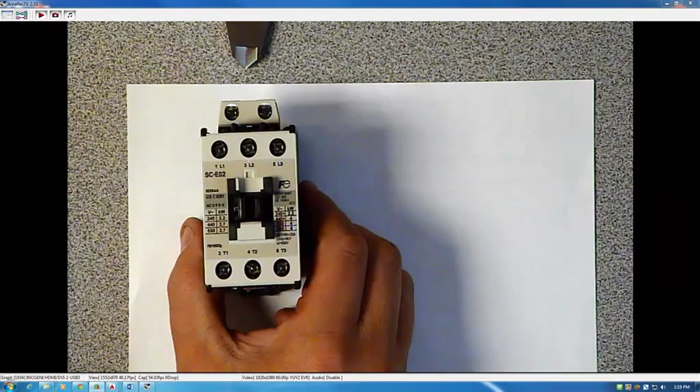This video is going to show you how to make a two-dimensional model of some components. So this is actually going to apply to almost all things you're going to measure and actually draw with AutoCAD. So first thing I'm going to show you here is this motor starter, or this contactor, I guess you would call it. It doesn't have overload contacts, so it is actually a contactor.

So oftentimes you would use AutoCAD to draw this component, an actual pictorial drawing of this component, and you would use it for laying out a basic electrical panel or any electrical panel for that matter. So it's very helpful to be detailed in your drawing and to actually include labels and things like that.

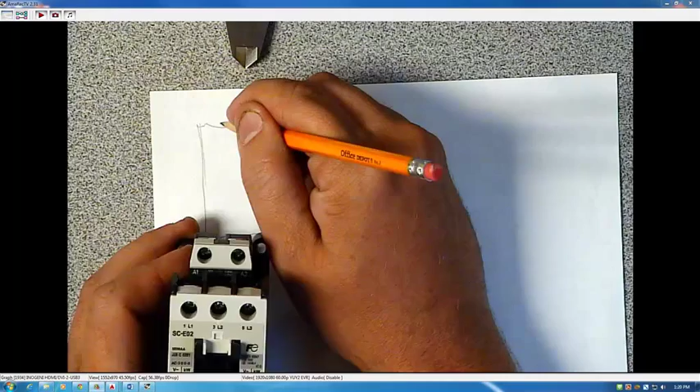Okay, so first thing I'm going to do is, you see I have a white piece of paper underneath this contactor. I'm actually just going to draw the basic shape of this, and it doesn't have to be accurate. It's just a sketch. Okay? And then what I'm going to do is I'm actually going to measure parts of this. Oh, I forgot this little bump on top here. Okay. So I'm actually going to measure some parts of this.

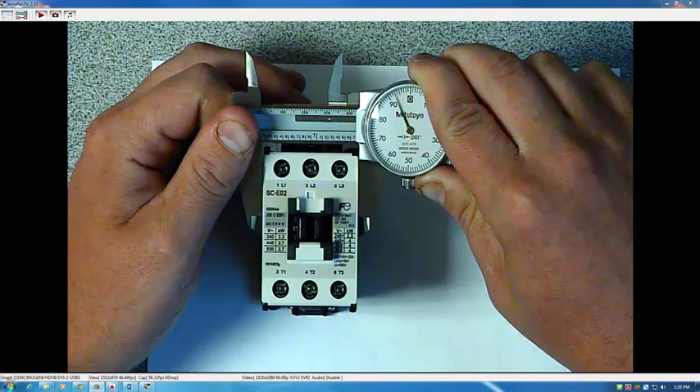So using our dial caliper, which you learned how to use in previous videos, we can read that this is 1.693 inches. Okay, so I'm going to draw in here 1.693.

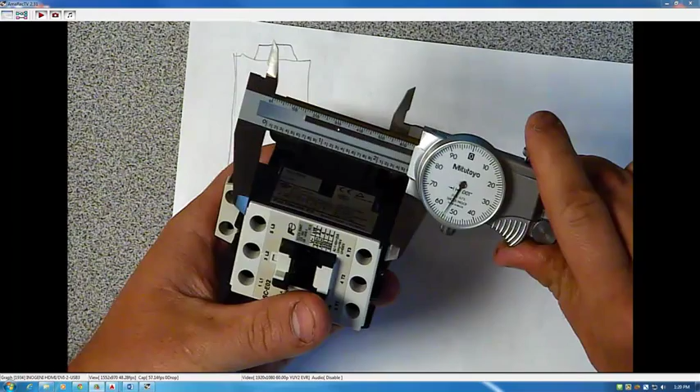And then the height, if we just kind of look at it and eyeball it, this top height right here is about the height of the whole contactor. Okay, and it's not critical to be perfect, but close is good. So this distance is 2.771.

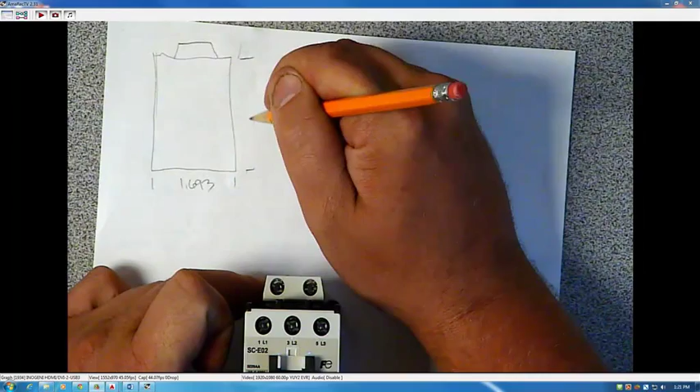Okay, and what I'm going to do is I'm going to measure this distance here as 1 point, that's pretty close to 1.1. We'll just go with that.

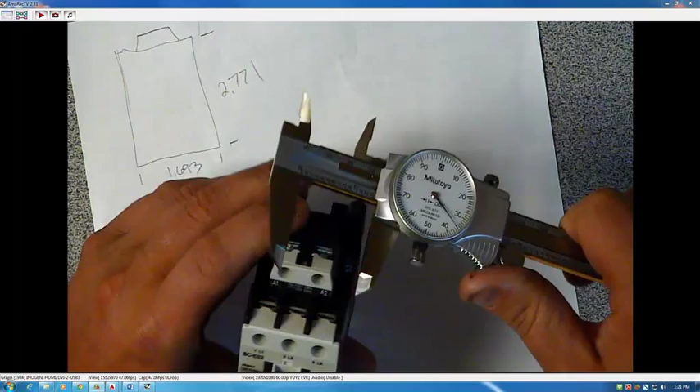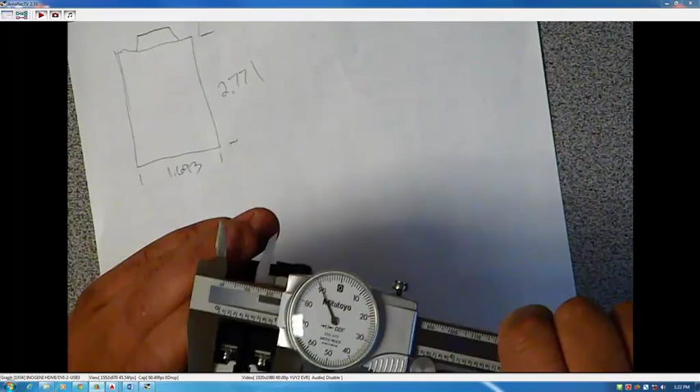And then this one, I want to measure, okay, I'm going to try to use the flats on your caliper. This is 0.99. We'll go 0.99. Okay, so put that in our sketch. 0.99,

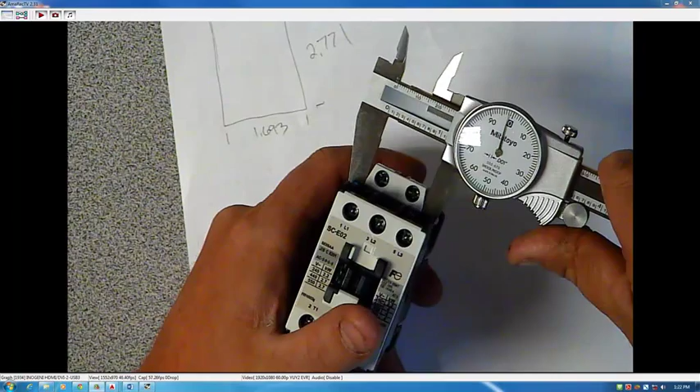1.1. Always measure twice, cut once. I think I forgot that measurement, so measure twice. 1.1. Okay. So that's the basic dimensions of this contactor here. Okay. So now for our holes,

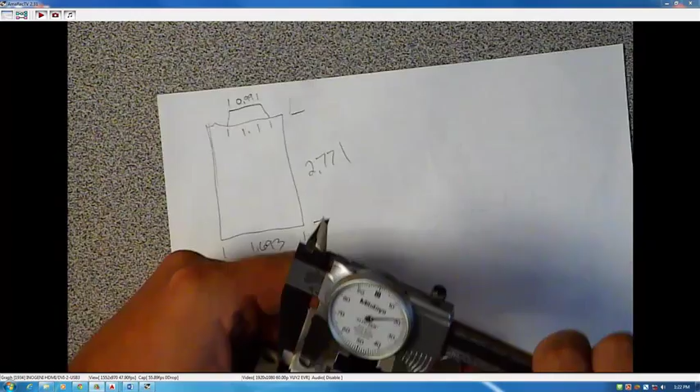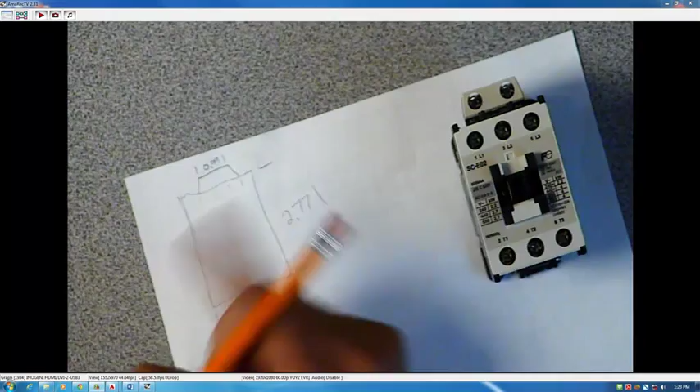we can actually measure to the edge of the hole, or the quadrant is 0.115. So 114, 115. So what I'm going to do is actually show this drawing on here. Show circles. .115. Okay. That's going to just kind of extend across here.

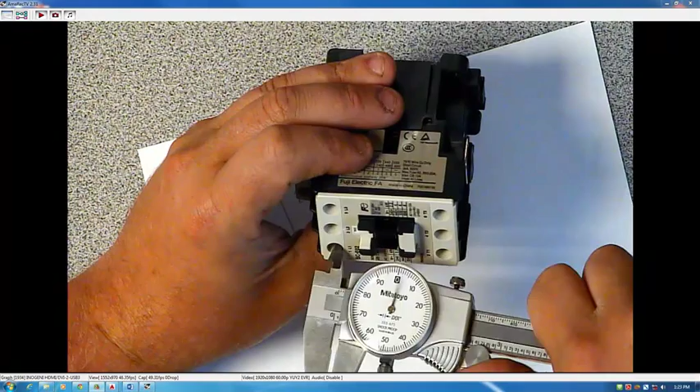We're going to measure the diameter of the circle using the inside of our caliper, the inside measurement tool. It is going to be 0.3 inches. If you look at the caliper, 0.3.

We're going to measure the distance from the edge. So it's 0.1, let's see if I can get that glare off there, 0.184. Put that on my sketch. I'll measure the distance between these. Point 213.

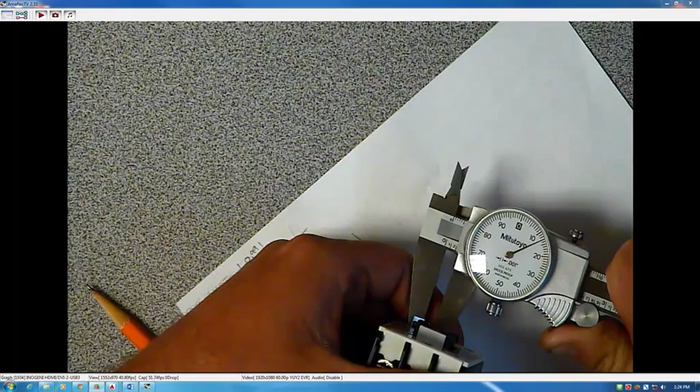And this one's going to be the same. 0.213. And this is going to be 0.184. Okay, so there's my sketch. And it's safe to assume that the bottom is exactly the same as the top. You'd just be measuring off this bottom here.

Okay? And now for this upper piece, you can actually just measure, we'll measure from this point here is 0.9.

I'm sorry, 0.09. So 0.090. 0.090. And this one is 0.090 from here.

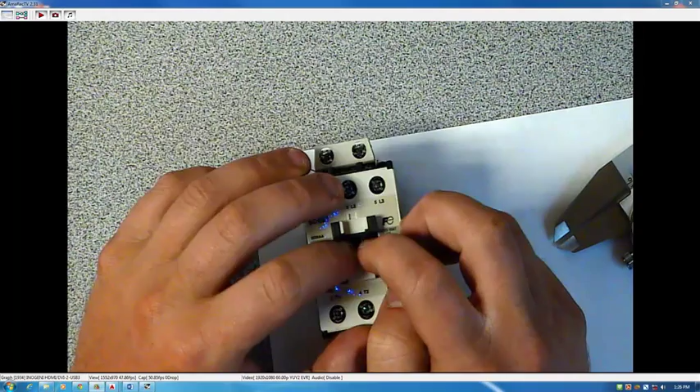Okay. Now, obviously, my sketch is not perfectly accurate, but it defines this pretty well. Okay, and then later on, I would actually dimension this center so it looks like a contactor. I'd measure this square here and measure the center here. Okay, but for right now, I'm actually going to open up my AutoCAD software and show you how to actually draw this based on our dimensions.

So I'm going to slide this over to the right. Open up AutoCAD. Just open up our base drawing here. See if I can get both these on the screen here.

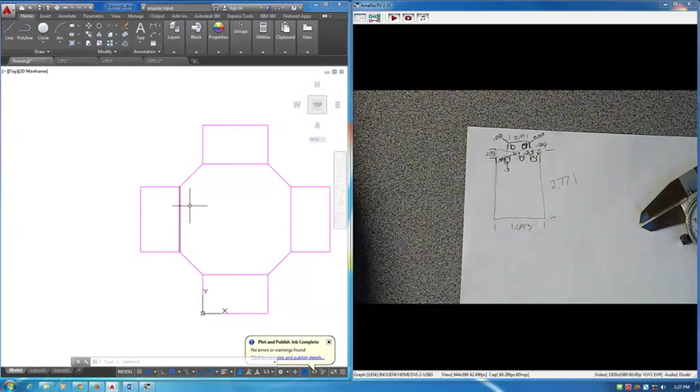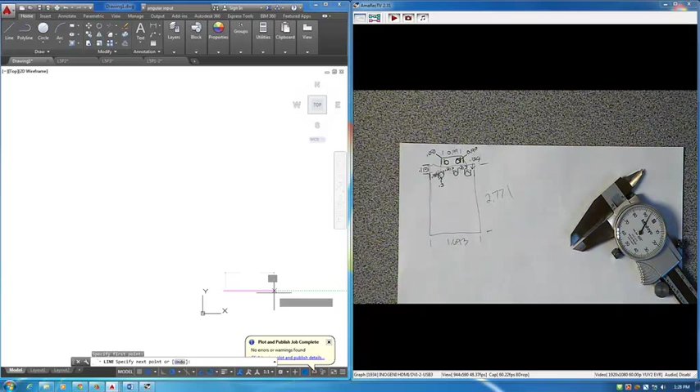Right. So let's erase this. This is from a previous recording. So I'm going to actually draw these dimensions we have on here. So let's start, specify that line. I'm going to go 1.693. I'm going to go up 2.771.

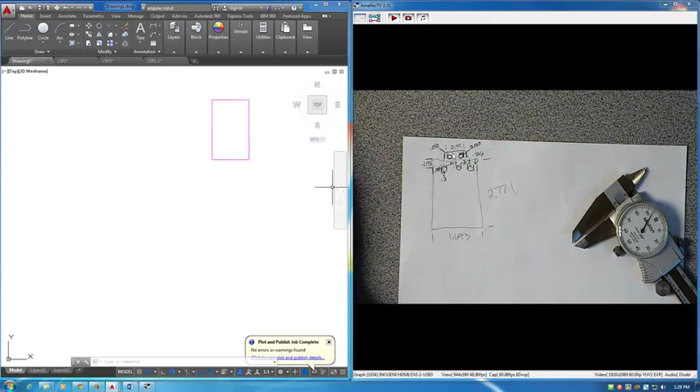I could have made a box too, but I'll show you why I do this way. It's easier to offset a line than offset a box. Okay, so we have our base contactor here, and now I want to actually draw this part here, and I missed one dimension. I missed the height. So actually I'm going to go back here and measure this height.

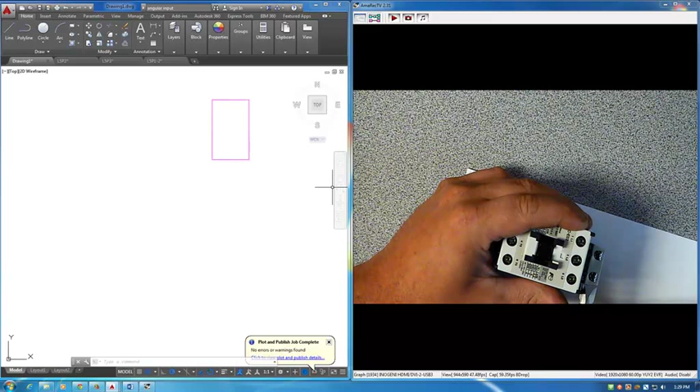Now this one is going to have to be kind of a guess. I don't know how high it actually is. Like I said, it's not critical for you to be perfect, but pretty close is good. So we're going to go with 0.436.

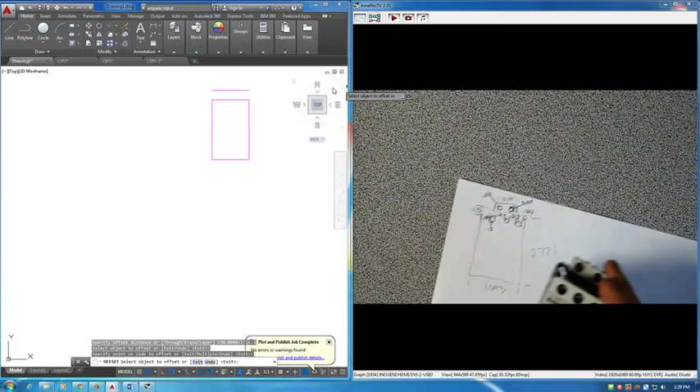So actually I'm going to offset this top line 0.436. Okay. And then, okay, and then I'm going to actually draw a line from the midpoint. I gotta turn my object snap on.

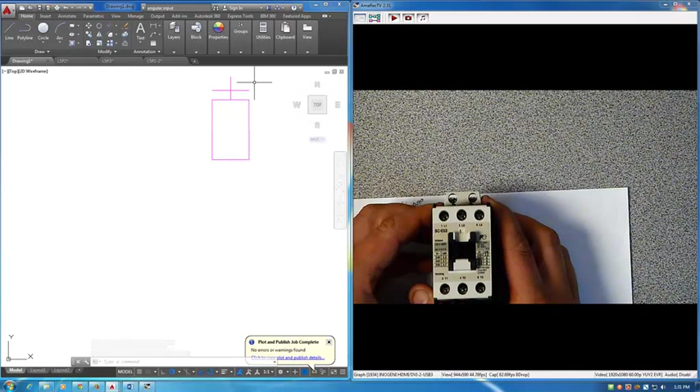Midpoint. Okay. So I actually want to draw a line. Turn my grid snap off. Straight up from here. The reason I do that is if we look at this contactor, this tab on top is directly in the center of the contactor. So we can actually draw it based off our measurements and the center of the contactor.

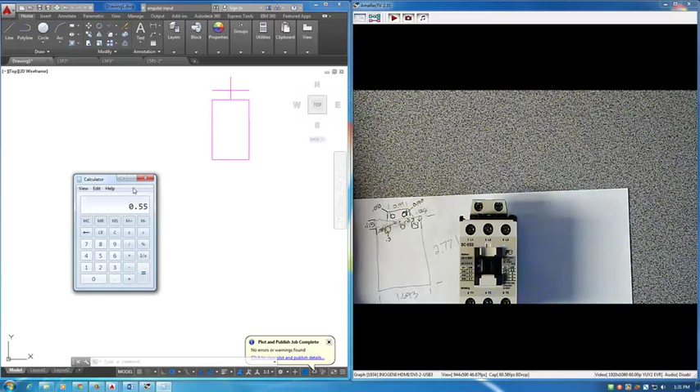So if we remember what the base was, 1.1 inches. So half of that, let's pull up our calculator. 1.1. Obviously I shouldn't need a calculator for this, but I am so I don't make a mistake. 0.55. So what I'm going to do is I'm actually going to offset this center line here 0.55 inches. Okay.

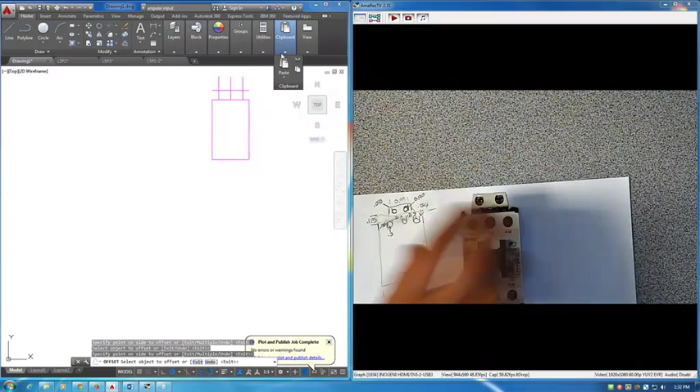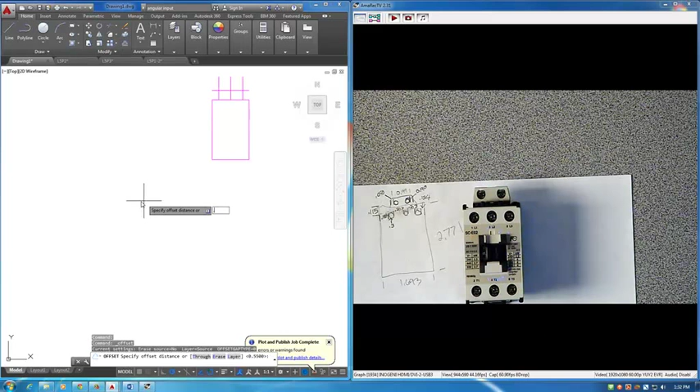And then this top of this tab was 0.99. So calculator again. Clear. 0.99 divided by 2 equals 0.495. So that's my offset distance. Offset 0.495. Okay, so now all we need to do is draw a line from here to there.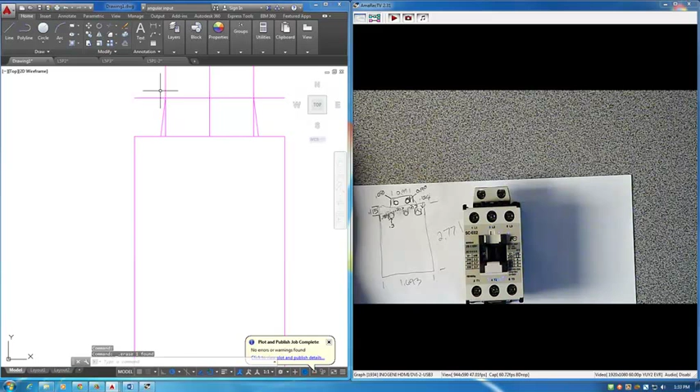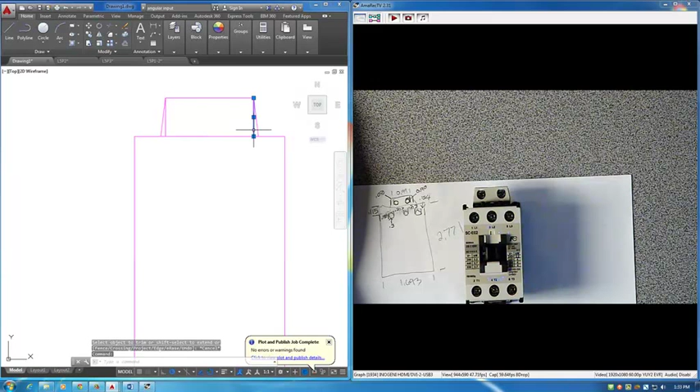Okay, this line can delete, this line can delete, this line can delete, and then we're going to trim the rest of them. So trim, then push enter, and it'll just trim off unnecessary items. Okay, we'll have to delete these two. There you have it. So there's that.

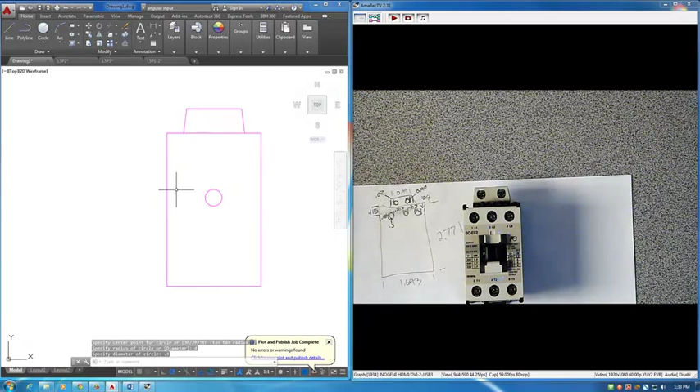Next is our holes. So the way I do this is I actually make my circles. So I'll make a circle, specify my center point, I don't care where that is right now, but I want a diameter of 0.3. So see on the screen it says specify radius. So I could specify 0.15, or I can put D and then say 0.3. Okay, and now if we zoom in

to our drawing on here, you can see the edge of this circle is 0.184 from the edge, and 0.115 on the top. So again, we have some offset distance. Offset 0.115, the top, offset 0.184. Okay, so that doesn't really do a whole lot for us,

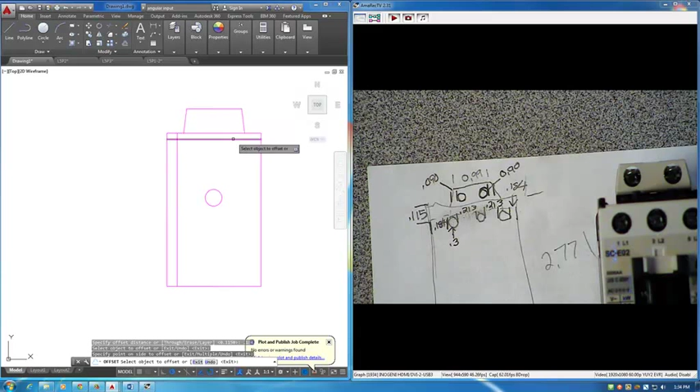because when we try to snap this or move this circle, move, actually we can select quadrant, tangent. Okay, so I can move it, but it doesn't give me anything to snap to, so that's not going to do us any good.

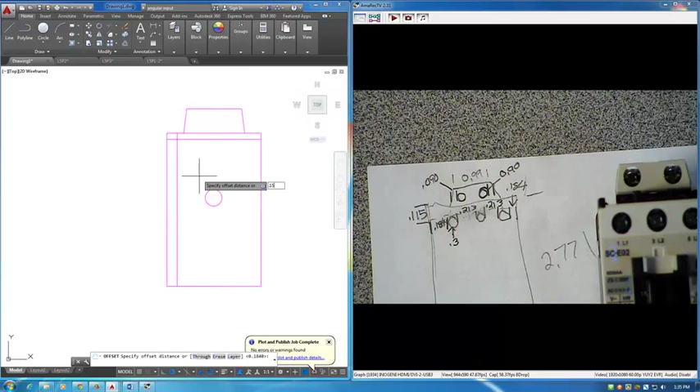But what we can do, since we know the diameter of the circle, we can offset this line the radius of the circle. So the diameter is 0.3, so the radius is 0.15. Okay, now we go to move this, move, we'll select this quadrant. Look at that. Look where our hole ends up. Perfect.

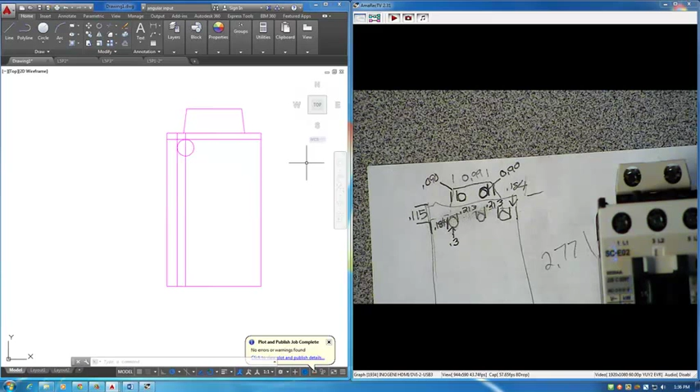So now, if we want to offset, since we have the center point here, see this drawing here, 0.213, we can offset the same distance only using this line instead of this line. So offset 0.213.

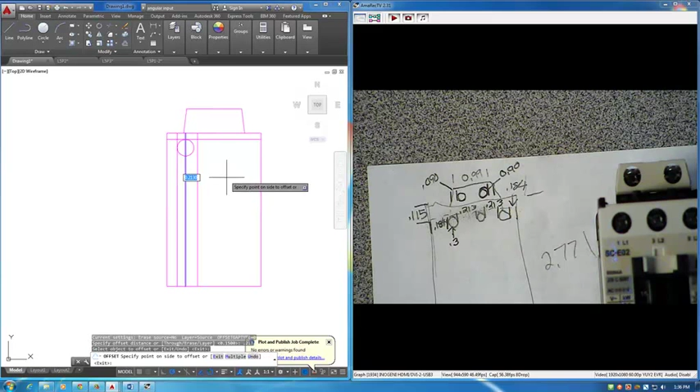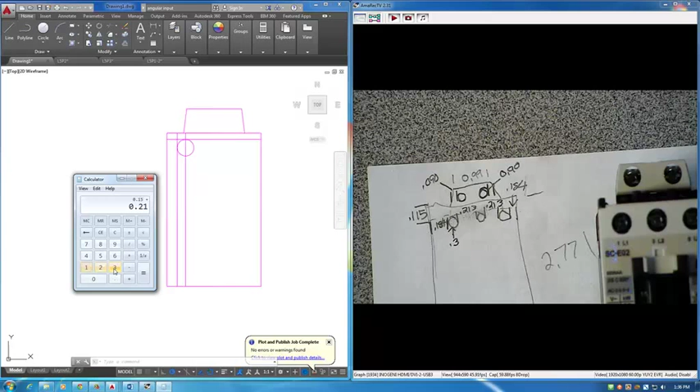I'm sorry, that is actually using the edge of this hole. So we have to add 0.15 to 0.213. Let's get our calculator out again. 0.15 plus 0.213, 0.363. So offset 0.363. So a lot of this drawing is actually mental. You have to do a lot of thinking based on what your sketches are and where you're basing your drawings from. Okay.

So I forgot my number, guys. 0.15 plus 0.213 is 0.363. So offset 0.363. Enter. Okay. So there would be the edge of the next line, and we need to offset this 0.15.

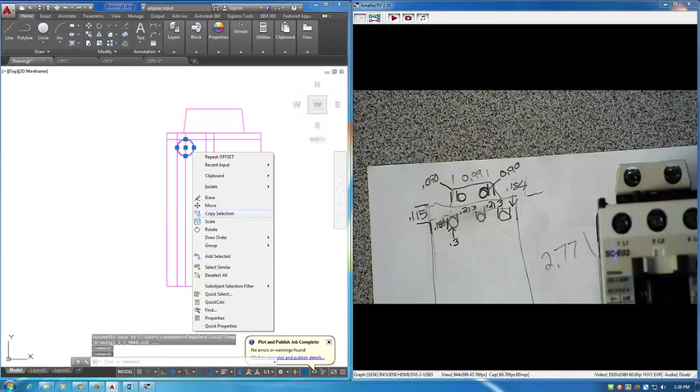So instead of making a new circle, I can actually just copy this one from this quadrant, paste it there. Okay, so if what I did there was confusing, I'm sure it was because I stumbled around a little bit. What I did is actually, if we look at our sketch here, this measurement was 0.184 from the edge of the contactor to the edge of the first circle. And the reason I couldn't use that is because there was nothing to snap to actually get that circle exactly there. So what I did is I offset this line half of the diameter of the circle so we have the center. So 0.15.

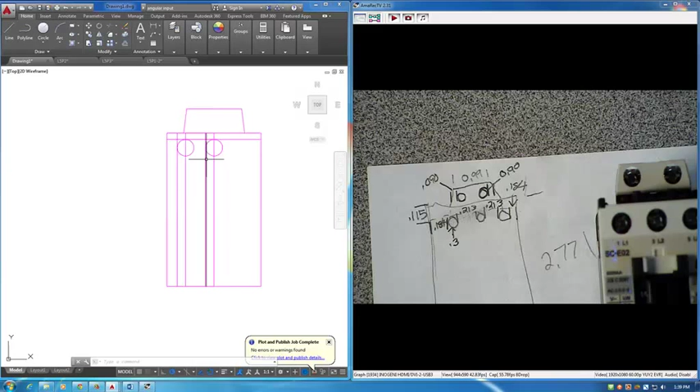Now we could use this upper quadrant. Remember, a quadrant is actually 4 points around a circle. You have 0, 90, 180, 270, 360. Okay, so the 4 quadrants on a circle, you can use them to snap to, and that's what I used to snap here. And then this measurement, 0.213, was from this edge to this edge. But then I needed to add 0.15 for this distance here, and another 0.15 for this distance here. So our center of this circle was 0.213 plus half of this circle and half of this circle from this line.

Okay, so I'm going to do this last circle and then I'm going to leave the rest up to you guys. So one way we could do this too, we could offset 0.15. Now watch where that brings us. That brings us right to the edge of this circle. And then this distance, 0.213, offset 0.213, enter, there. Now that's not the center of our circle, so we need to offset 0.15.

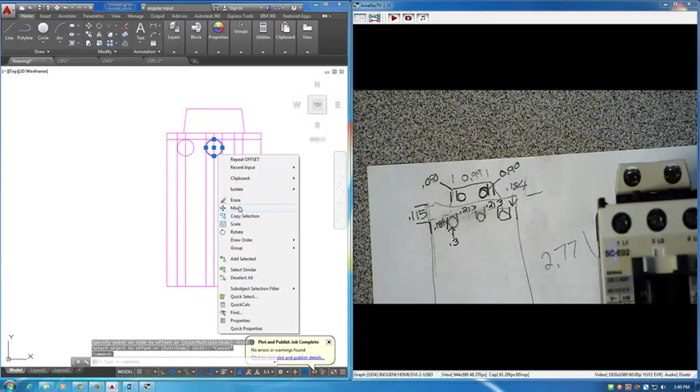Then I'm going to copy from this quadrant. See my snaps, the quadrant. Move right there. Okay. Now don't delete these lines after you draw them because you'll use them for the bottom. So now all you have to do for your bottom is figure out this distance from the bottom of the contactor to the base of the holes, and copy these circles, paste them down here.

Very simple. Okay, and then don't forget to actually draw out this square, so measure a distance from the edge of the contactor to this square and make that in the center. And if you want to, you can actually add the model number and everything, the ratings and all that. You can add those at a later date after you learn how to annotate.